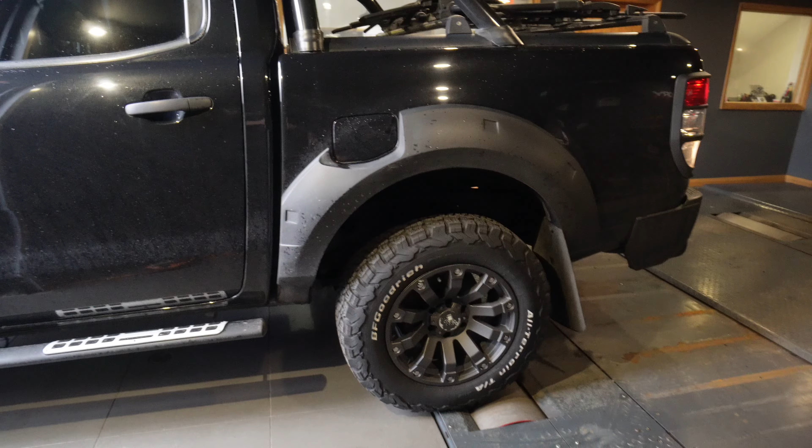Won't quite make it in with that, I don't think. There we go. Height problems. Yeah, you got a bit of a gap. Oh, she just fits. I might move over my way a bit. No, that's bang on that.

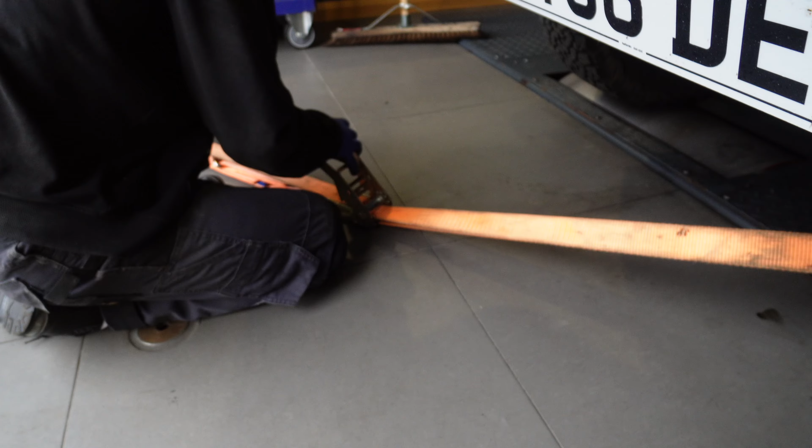So this is the Ranger on the dyno. Just about fits. Loads of room. As you can see, just on the edge. And lengthways, they just about fit, but they fit. We're happy with that. Right, first car, the Ranger. Let's see what this does.

Right then, here we go. I've got a mic, so hopefully the actual sound's better. I'm going to be using Flex on this Ranger, just to set it up. I always find it quite stable on these cars. So, first things first, let's get the dyno set up.

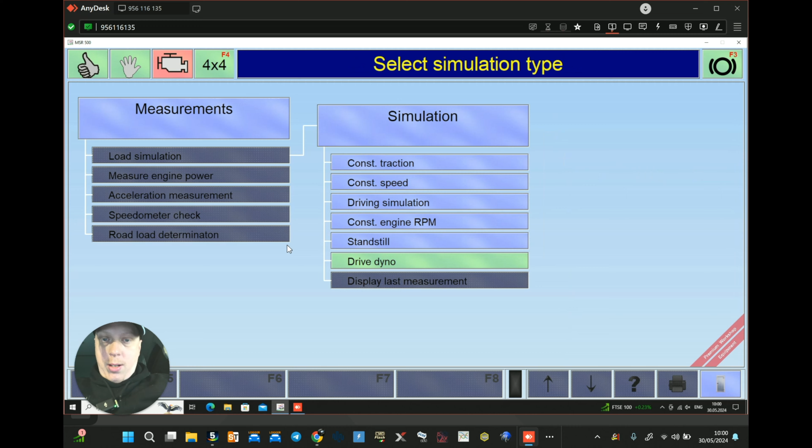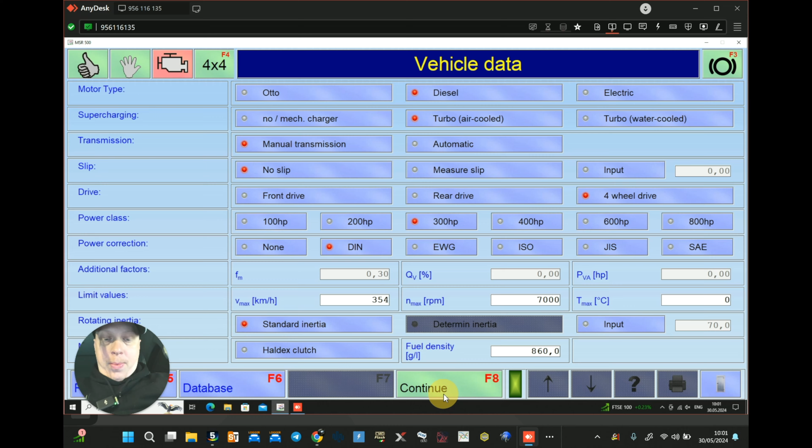Alright, measure engine power, continuous, so it's 4-wheel drive. So we've got diesel, turbo, manual, no slip, 4-wheel drive. 300 brake, probably a bit less than that, but it just grabs it better. Continue, set this bad boy up. Right, that's dyno set up to the car.

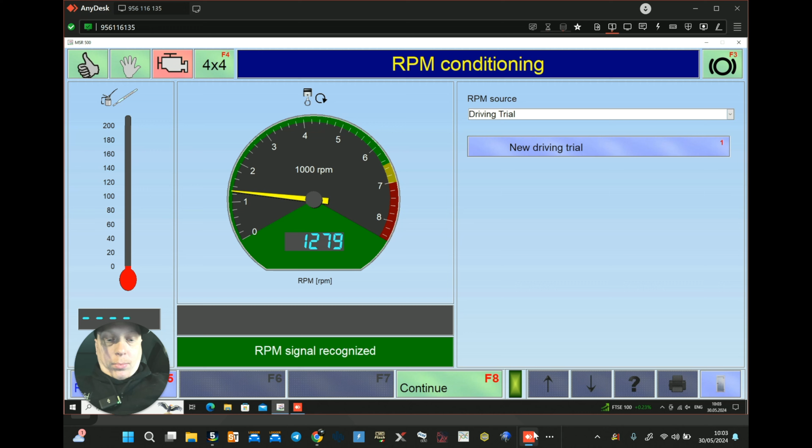I'm not sure, but I might be able to log the car with this too. Ford SID209, I think. OBD. No, it doesn't look like I can. So I'm just going to ID it with this. SID209. So go back one. It's a slightly older ECU. Full OBD.

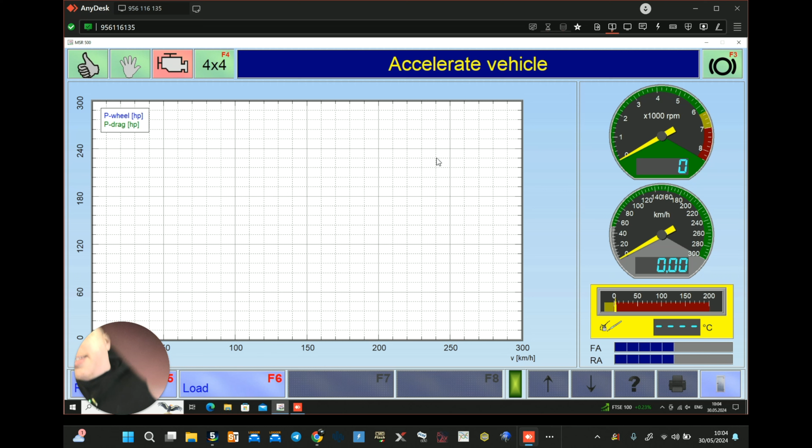Conditions aren't correct, but the engine's on, but I'm connected, so that's okay. So I'm going to run it as it is. I'm on my own logger, I think. The OBD port isn't too bad on here, so I'm not running the extension. It's a Ford, but we would get away with a generic. It's only a stage 1.

So you can read quite a few things on these. Let me just pause it. I'll set this up, and we'll start the test. So that's that set up. I've got engine RPM, boost, fuel, injection time, intake air temp, air mass flow, and the torque references. That should be enough just to see what's going on. And that is now logging. So let's do our first pull. Get it into gear. Give it a whiz.

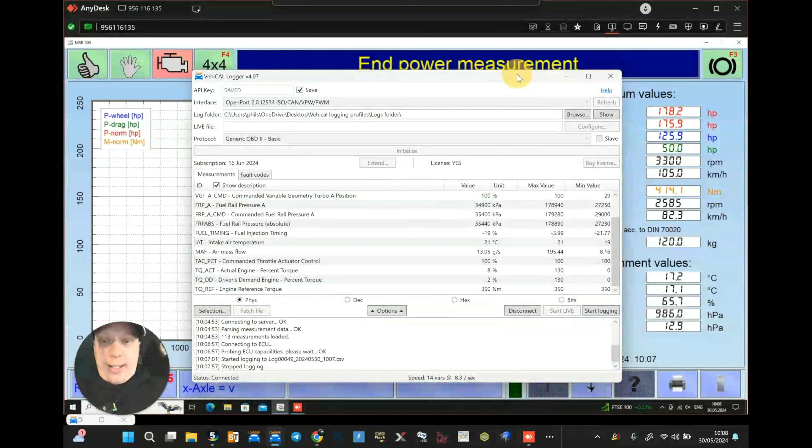So let's see. I'm going to read it off with Flex, and we'll begin. Right, this Flex is an absolute full read. It's an absolute rock star. So I am actually going to do a full backup, so if there's any issues with the ECU, you've always got a full backup to go back on bench. Right, plugged in. There we go. Look at the voltage down there. I won't bore you with this bit. Just full backup. Off it goes. We're back in a minute.

Right, so first issue of the day. The ECU has been patched by another tool, which means somebody else has been here before and patched that ECU, so it won't let me do anything else now with that ECU. So I'm going to swap tools, because it depends on what tool it's been patched by, and I'll see if CMD says the same thing. It possibly may be that we don't do this car based on that, because there's no point destroying someone's ECU. It's just a case of see what it's like.

So get another tool out. Let's go. Just going to disconnect the tool from that. You can't just unplug these. And then off we go. So, I've just been seeing the customer, and he's saying he's had it since new. As far as he knows, it's never been anywhere else. So I've gone and got CMD just to see if this car has actually been. I'll see if this will pick it up and sort something out with it. So we've got Ford.

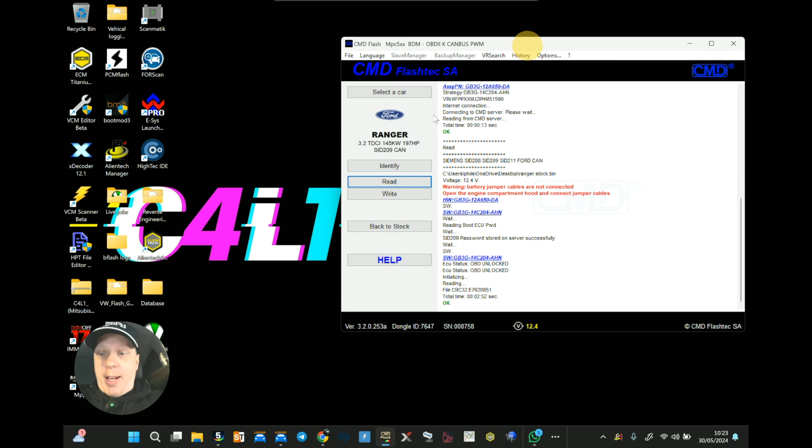But hopefully it's not actually been anywhere. The guy said he literally bought it from Ford, so it should be stock. So I'm not quite 100% sure why Flex is saying it's been patched. Right, so it's read it off. We have a read. Big Ranger stock. Just going to load that into WinOLS. Get rid of this one I did earlier.

So Siemens ECU, so it's a bit different to the Bosch stuff. So let's have a look. It's pretty much one I've done before as well, so it shouldn't be a long session. It's a 209, not 309, Ford Ranger, and then I'll put in the Ford numbers, which are these ones. And we begin. So I'm going to set this up. I'll be back in 2 seconds.

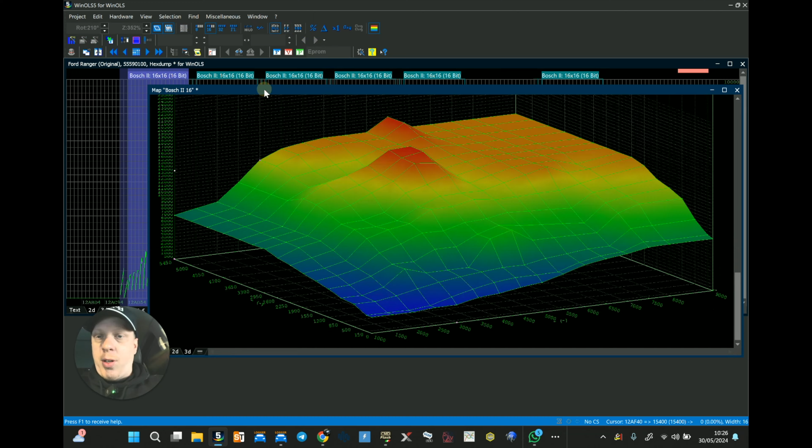Right, so with these, they are quite a little bit messy as they are. These are your rail pressure tables. So these are what tells the ECU what rail pressure to use at what point. And as you can see from stock, they are quite messy, I'd say. Because as you can see all the limits here, look. So this is what we're aiming for, around 1600 bar of fuel pressure. And there's like 16, 17 there, there's 18 there. They're quite messy from stock.

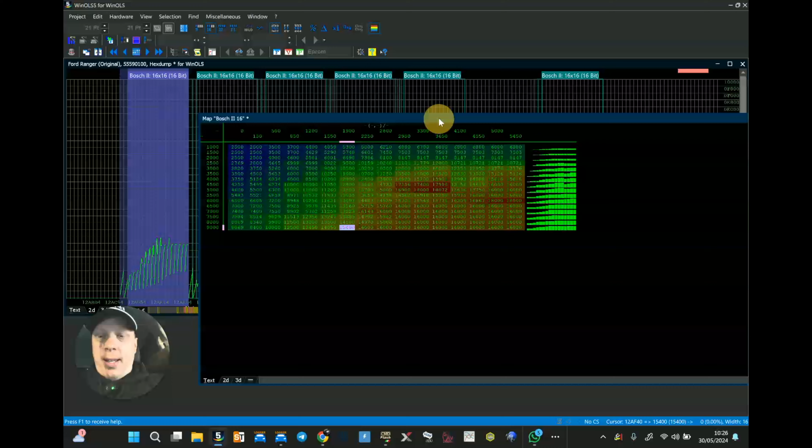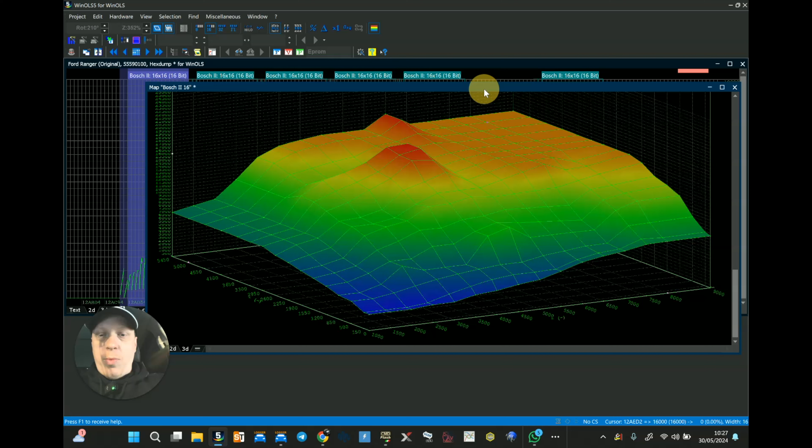So our first aim is to kind of smooth all this out and repair what is in there. So obviously the software isn't always about just the power side. It is a lot to do with the drivability and things like that. Because the OEM, they don't look at the tables how we look at them. They pretty much just drive the car around and feed back information from data logs into a neural network, which then pumps out another map which they load on and go again. So if they don't touch on these areas when they're driving around, you can end up with a bit of a mess inside the tables like this. So my first aim is probably just to smooth all this out to actually make it a lot tidier.

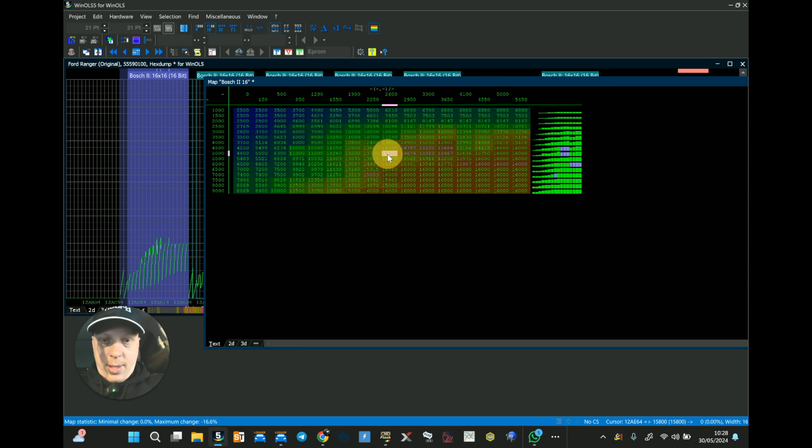So if we start smoothing these out, just to kind of be somewhere with it. Now I'm going to have to do more than that. So it's a big chunky area as well. Look at that. So if we take these little areas, look at that. Get in there. And just start smoothing them out. Really tidy it all up because it's a bit messy as it is, and we don't want that when you're driving around. We kind of want smooth transitions between.

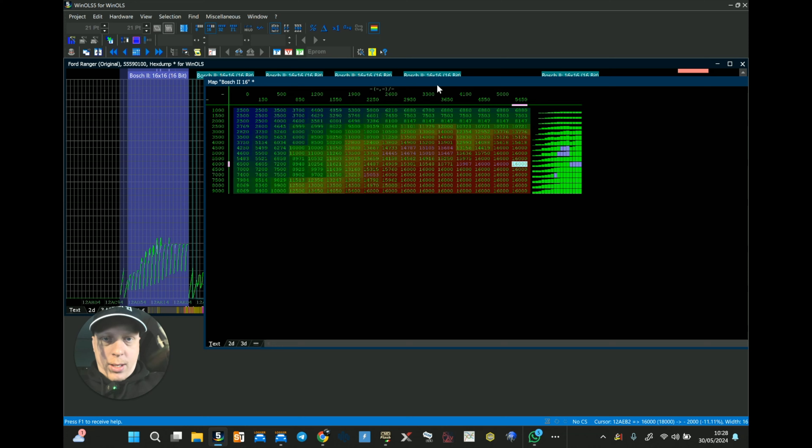Try and get that because there's big clumps, big dips and troughs in the software. It's actually a lot smoother than what it looks with the colours on. You kind of start to get a bit of a sense of it. So if I go to that point there, before 2000, original 1800 value now 1600, so that's already dropped. So it's actually smooth there now. If I took it out and put it back in again, it will be smooth. These areas here, I'd rather it transition a lot better with the fuel pressure, even better than that still. It's just messy.

What I'm going to do, I'm going to go left to right. So again, just start putting it a bit better. Right here, here. I go up and down with that one. All four sides. Just to start making it better to begin with, because they are messy. So we are starting to get somewhere. We've done this area here, it's actually smooth now. Start smoothing all these little areas out, just so we've got something better to start with.

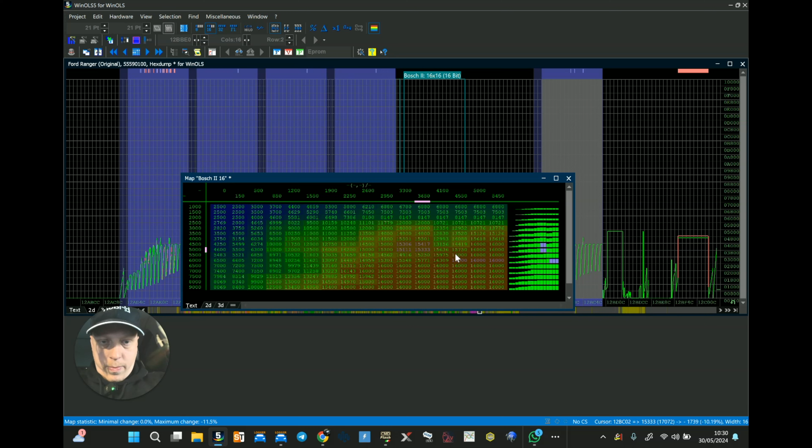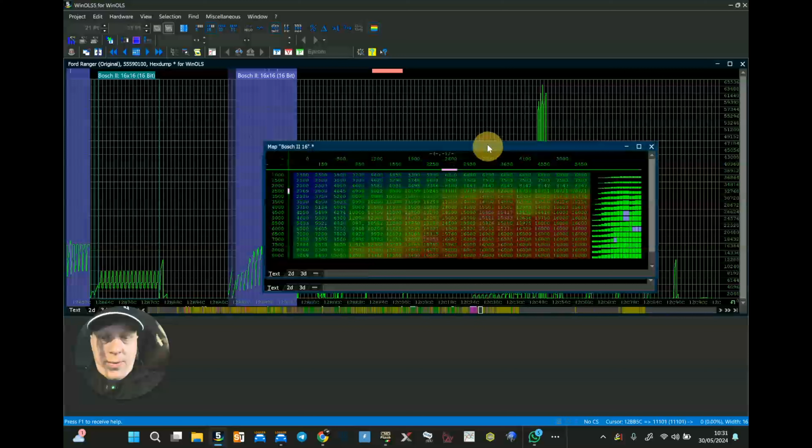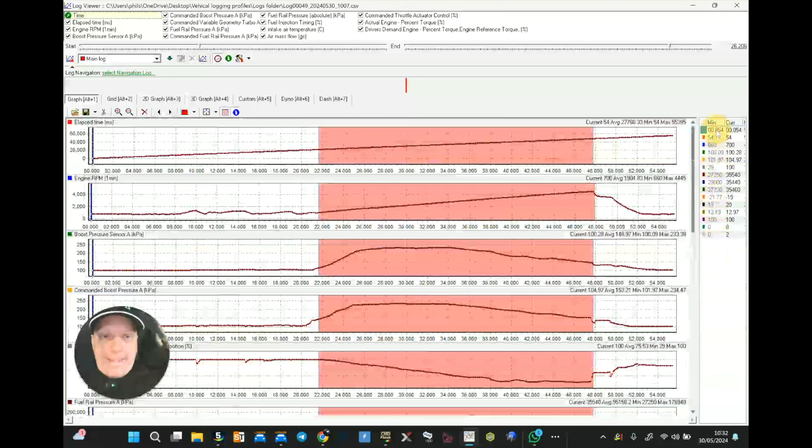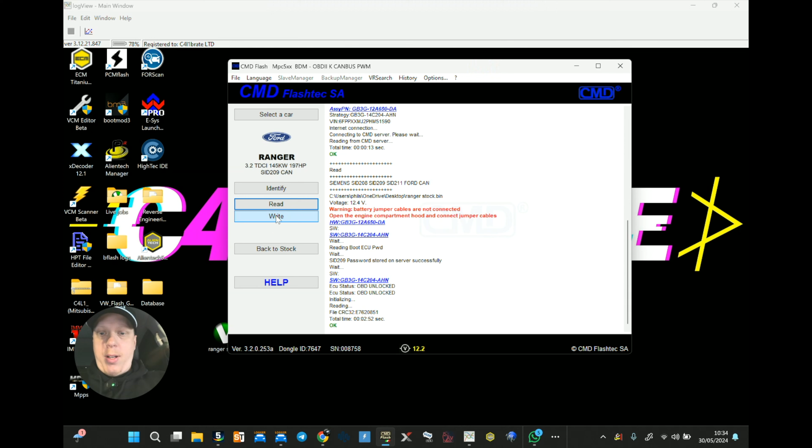So it's going to run like that first before I start doing anything with it. One, I want to see if it actually flashes. Two, I want to know if I can smooth those out. Right, let's go. Right, that has just finished. Took all of 7 minutes and 6 seconds, which isn't too bad. So I'm going to turn the fan on, give it a run as it is, and then we'll go again.

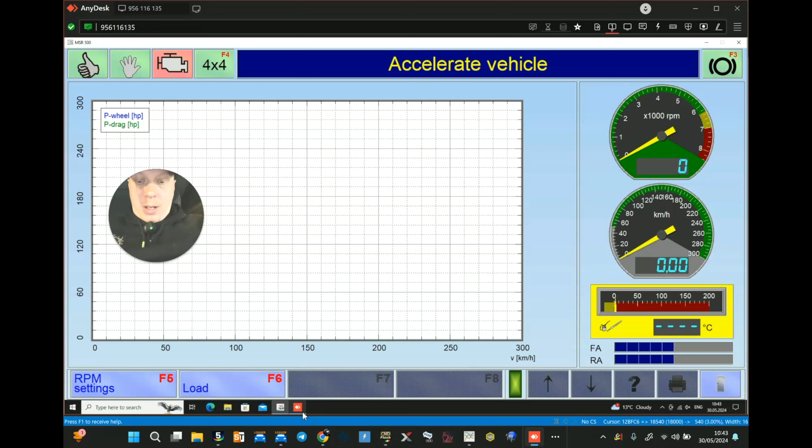Right, back in the car. Save this. Repeat. So back to the logger. Just be a case of connecting, off you go. Start logging. That's what I like about this logger. I don't have to keep going through all the different steps. I just set it up and go. So, traction off. There we go.

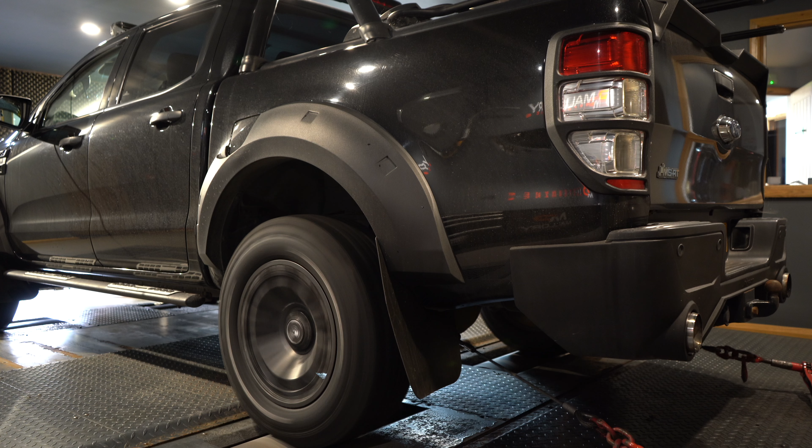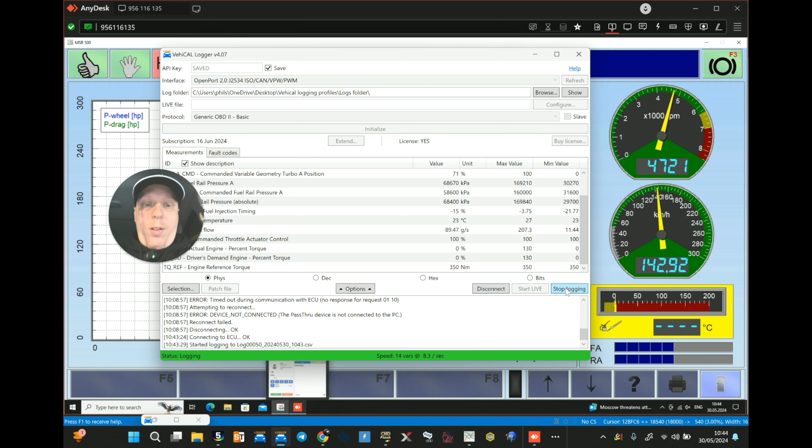So there's bits of maps changed, parts of the maps changed, but the main part is going to be the rail. So I want to see a nice flat curve for it. See what we made. So 204 so far with that stock rail. So we've got a smoother one. Load in the stock run.

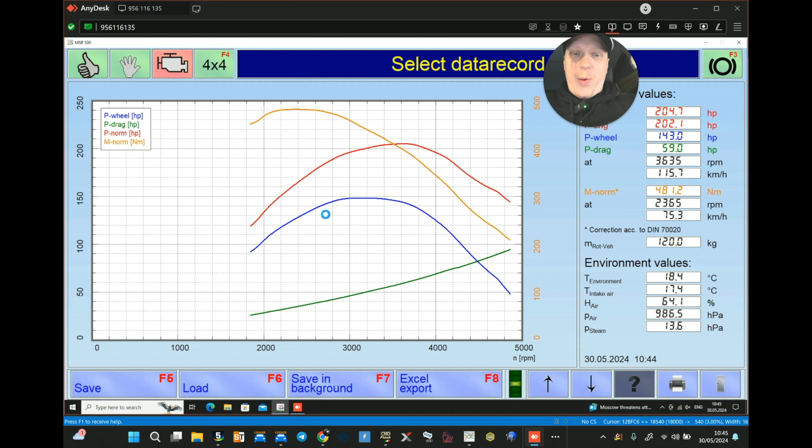It's more than just about these numbers. You want to make sure that you're getting a good, so we've got loads more torque everywhere, loads more HP everywhere. So we're already on to a winner. So we've got like another 10-15 brake we could possibly make out of this car, which is what we want. So we're back up to kind of a nearly stock power. It was a bit down. So I am going to tune it up a little bit, see what I can do with the rest of it. Send in some more rail. Let's have a look at the rail.

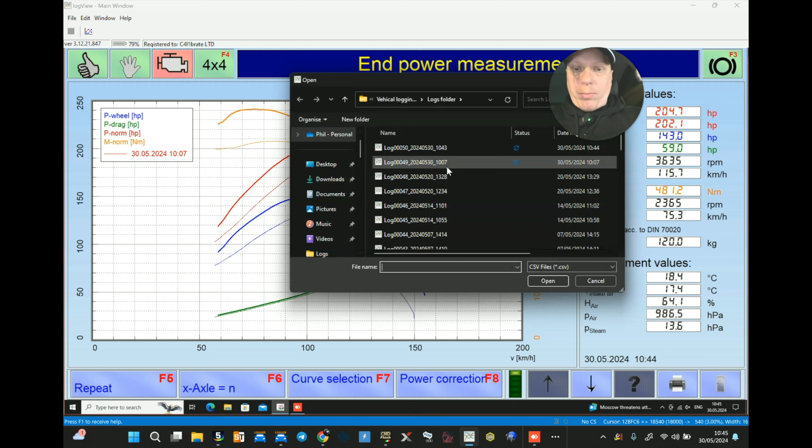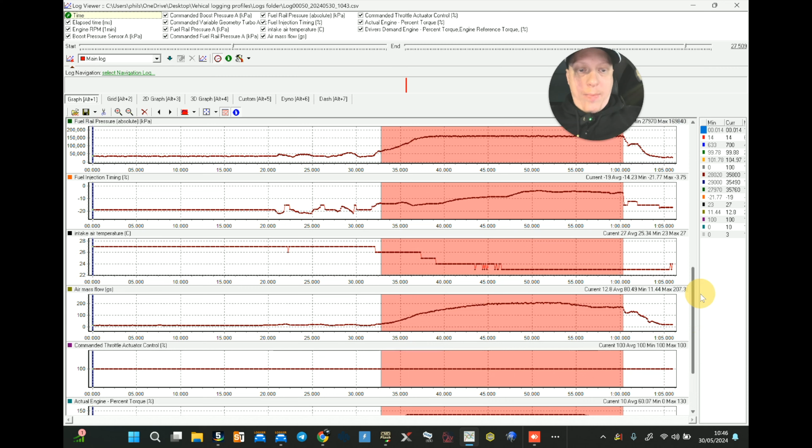So our rail pressure is now nice, flat. Just how we want it really, without them glitches. So we're in a better position to start tuning it now. So I'm going to add some rail, get this bad boy tuned up. I've already got boost. Our boost is already up, 245. Commanded torque is already up, 30%. So air mass is more. So I think it's just rail really. It's the only thing I'm not really touching on.

So I've made all that power without any rail pressure. Because when you buy the tuning boxes and things like that, all they're really going to focus on is the rail pressure, and we've done this without adding any rail pressure. So we're already in a better position than what you would do on one of them tuning boxes. So next up, send in some rail. See what that does.

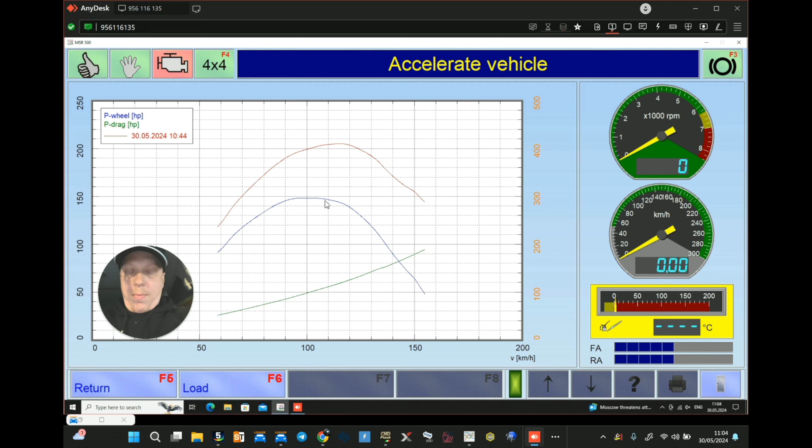Right, so I've rebuilt those rail maps now. I'm going to flash it to the car. Then we'll go again. Right, so that is that flashed and ready to go again. Just going to get this wire for the logger. Plug it into the side of the laptop. Right, here we go. So, dyno's already ready. We're flashed. Going to connect the logger. Start logging. So this is the run I've just done. And now we've got more fuel pressure. So traction off. Here we go.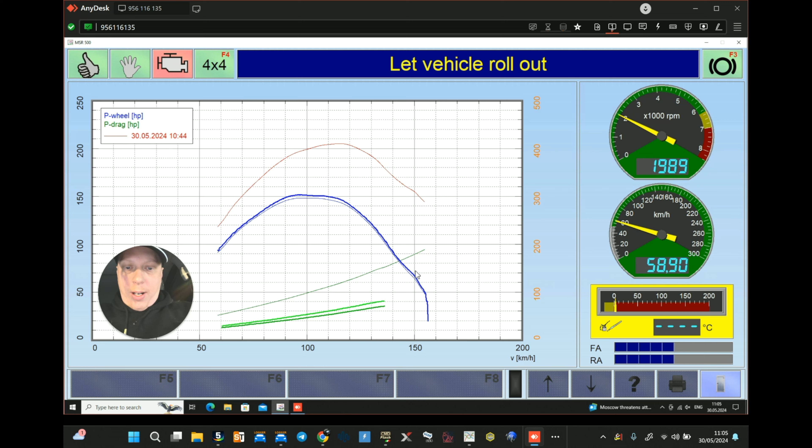So you can see 16,500. Didn't make that much difference really, so I think we're pretty good. 208, 487. So we made a bit more torque and a bit more HP with that little bit of rail. We're only talking, what, 50 millibar, so not loads, but enough just to give it a bit of a spruce. So I'm quite happy with that. Let's have a look at what that looks like compared to the stock tune. So I'm just going to save it. So that was stage 1 version 2. Load the stock file.

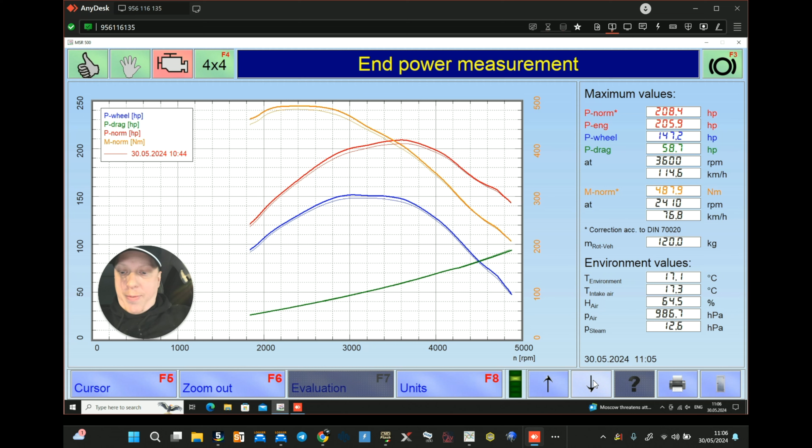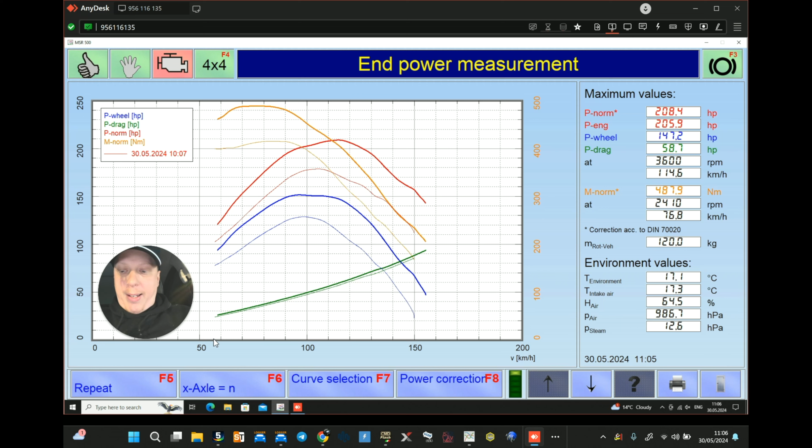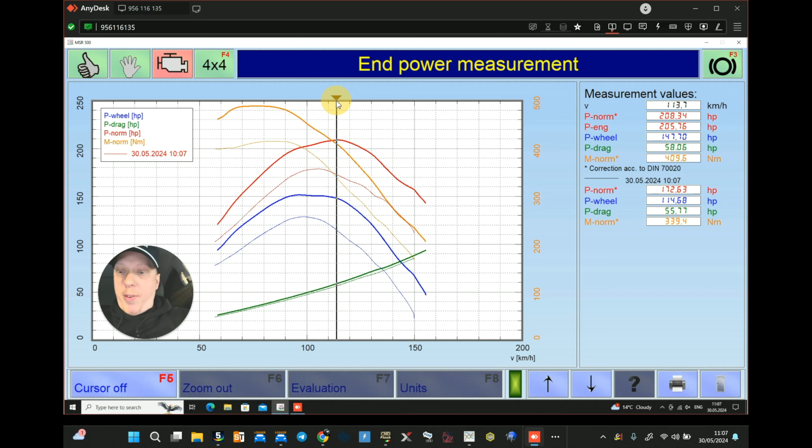So the guy was complaining about pull off and things like that. I think it's safe to say we've fixed that. So if I look at the cursor, we're now pulling a good 80 newton meters over the stock file on the initial bit where he was complaining about. So that's good. HP wise, a good 40. Yeah, it's over 40 brake through most of the rev range. So for stage 1, that's pretty much where you want to be. You don't really want to be pushing it too much. You don't really want to be making it smoke or clogging up that DPF. So I'm happy with that as it is. So that was a Ranger all done and dusted.